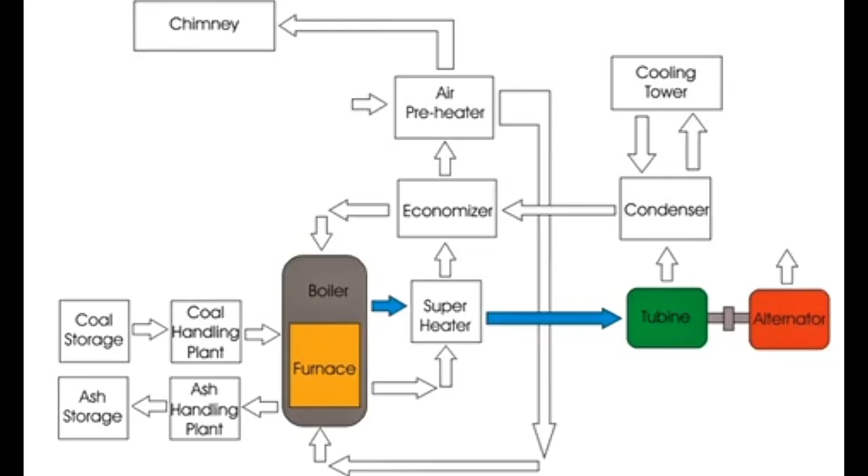Here, steam is produced in the boiler by coal combustion in the furnace. This steam is then expanded through turbine blades. The turbine shaft is the prime mover of the alternator. Due to this steam pressure, the prime mover of the alternator rotates. After expansion, the steam is condensed in the steam condenser and then fed again to the boiler. The rotation of the rotor in the alternator produces electrical power.

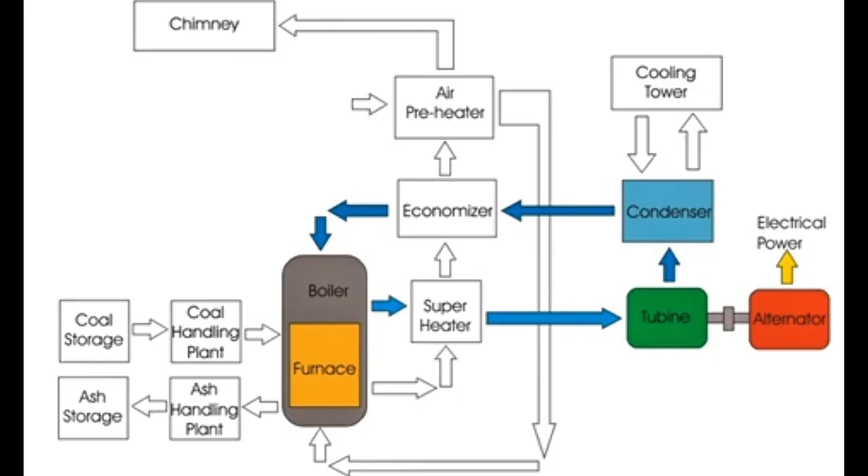These power stations do have some advantages, due to which thermal power plants are the most conventional plant for producing electrical power. Number one, the fuel is coal, and coal is quite cheap in price. Number two, it involves lesser initial and capital cost compared to hydro and nuclear power plants. Number three, it involves less space compared to hydro power plants.

But in addition to these, thermal power plants do have two major disadvantages. Number one, it pollutes the atmosphere much due to release of large amounts of smoke and fumes. Number two, its running cost is higher than hydro power plants.

This power station mainly involves seven major arrangements: one, coal handling plant; two, steam generating plant; three, steam turbine; four, alternator; five, water feeding arrangement; six, cooling arrangement; and lastly, the ash handling arrangement. Let us discuss these points in brief, one by one.

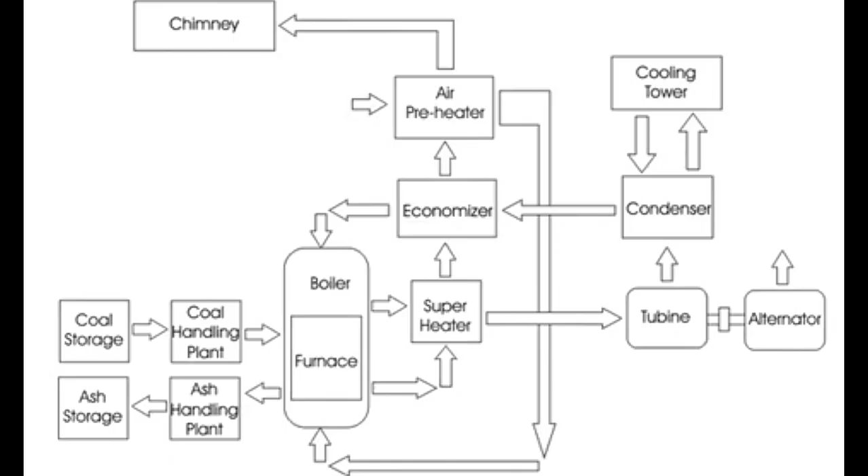The coal is first transported to the power plant, then stored in the coal storage plant. From this coal storage plant, coal is delivered to the coal handling plant, where it is first pulverized. Pulverization is required because it increases the thermal efficiency of the coal. This pulverized coal is then fed to the boiler furnace by belt conveyors. The coal is burnt in the furnace and produces sufficient heat.

Now come to the steam generating plant. The heat produced in the furnace is utilized to convert water into steam in the boiler. The flue gases from the furnace make their journey through the superheater, economizer, and air preheater, and are finally exhausted to the atmosphere through the chimney. The steam produced in the boiler is not fully dried.

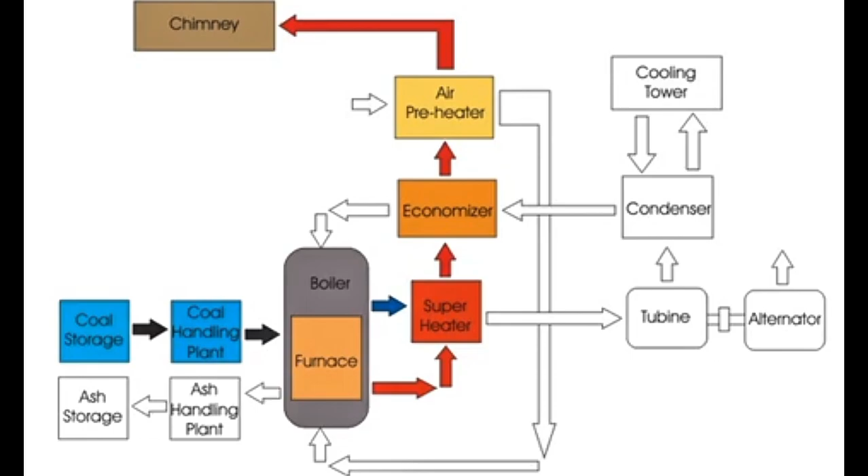That is why it has to pass through a superheater, where the steam becomes fully dry and superheated much above the boiling temperature of water by the flue gases on their way to the chimney. The superheated steam is then delivered to the turbine.

After passing through the superheater, the flue gas still has some heat energy in it. Some portion of this remaining heat is utilized to heat up the feed water to the boiler. Feed water passes through the economizer before being fed to the boiler, where its temperature is increased by extracting heat from the flue gases.

After extracting heat in the economizer, there is still some remaining heat in the flue gases, which can be further utilized to increase the temperature of air before feeding it to the furnace for coal combustion. This air heating is done in the air preheater by means of flue gases on their way to the chimney. Anyway, the superheated steam is forcefully expanded in the turbine and hits the turbine blades, causing the turbine to rotate at high speed.

The rotor shaft of the alternator rotates by means of the rotating turbine. Generally, the turbine shaft and rotor shaft are coupled together.

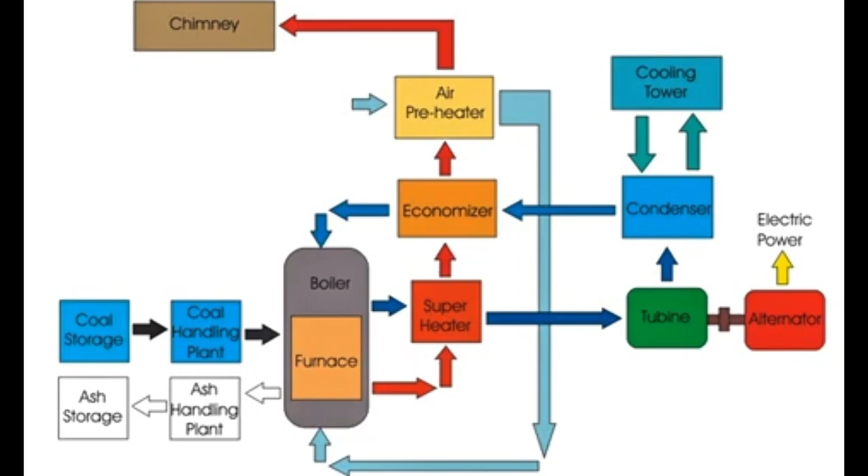After doing its work on the turbine blades, the exhausted steam has to be condensed immediately to give space to the steam behind it. This is done in a steam condenser by means of cold water circulation. The condensate from the condenser is fed to the boiler for further cycle. During this cycle, some water may be lost, which is compensated by feeding water from an external source.

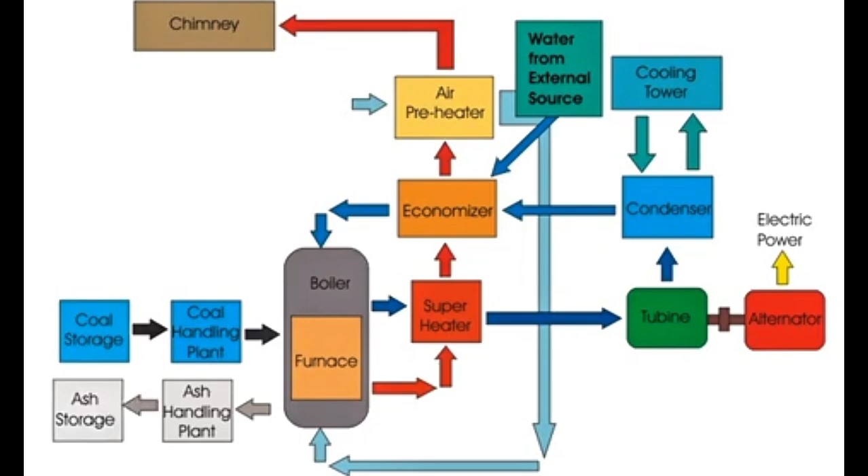The water circulation is done in the condenser by means of water available in natural sources, like rivers, canals, lakes, etc. The coal is burnt in the boiler, and ash is produced after the completion of combustion. The ash is removed to the ash plant and then delivered to the ash storage plant for disposal.

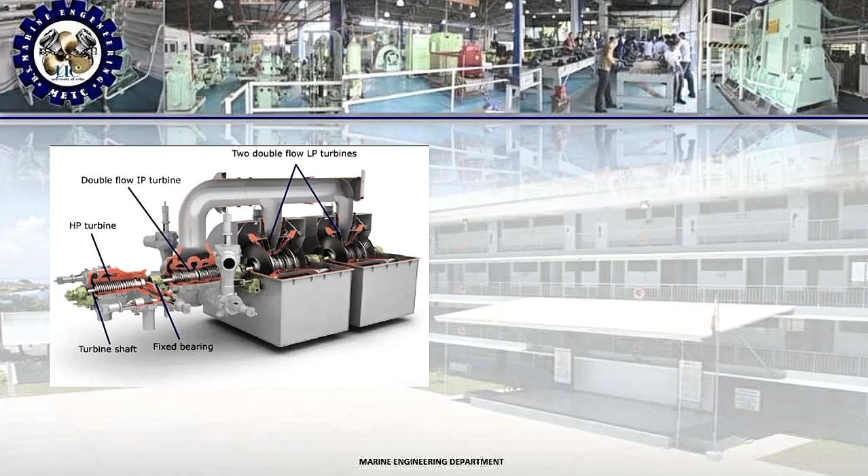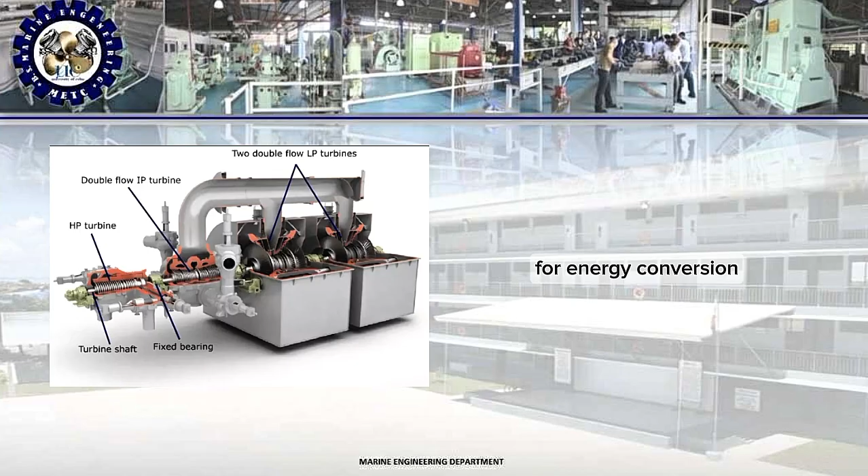Following that overview, let's zero in on the steam turbine. In a steam propulsion plant, the turbine is the single most important component for energy conversion. Its efficiency directly determines the ship's fuel economy and maximum speed.

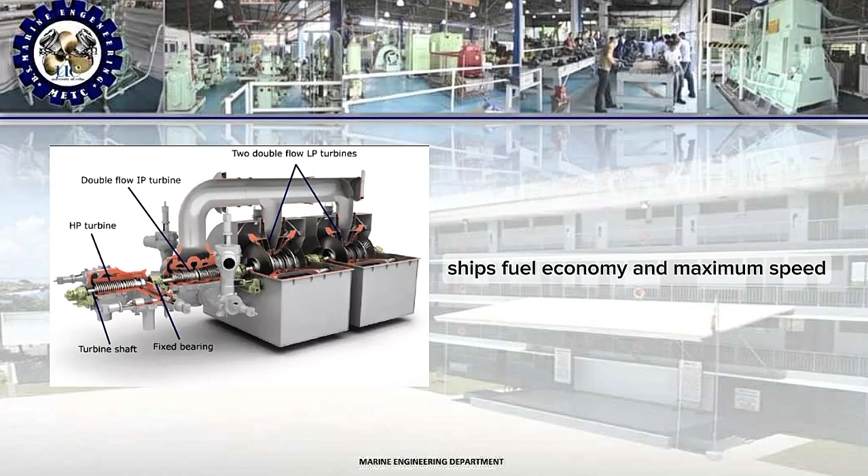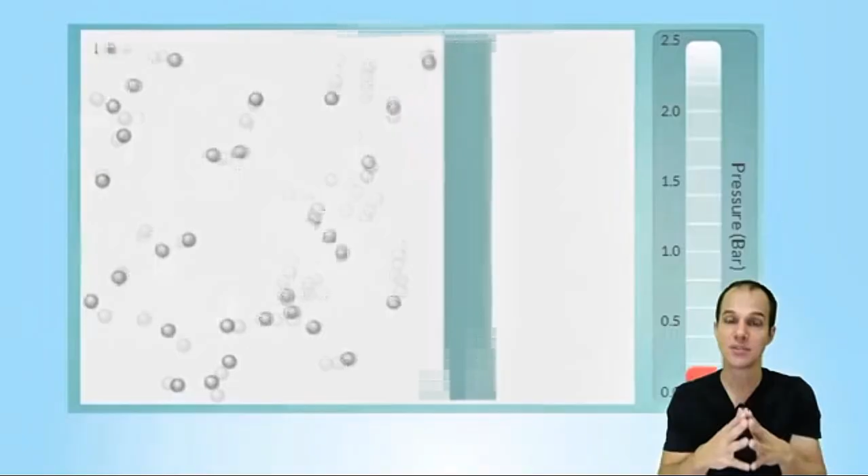So there's an experiment, a demonstration, an illustration that first shows if we keep this temperature constant, what happens to the pressure and the volume. You observe that when we increase the pressure, our volume decreases. It is an inversely proportional relationship.

Since this is clear to us, let's add another parameter. Let's add temperature, let's add temperature variation. Then things change a little bit.

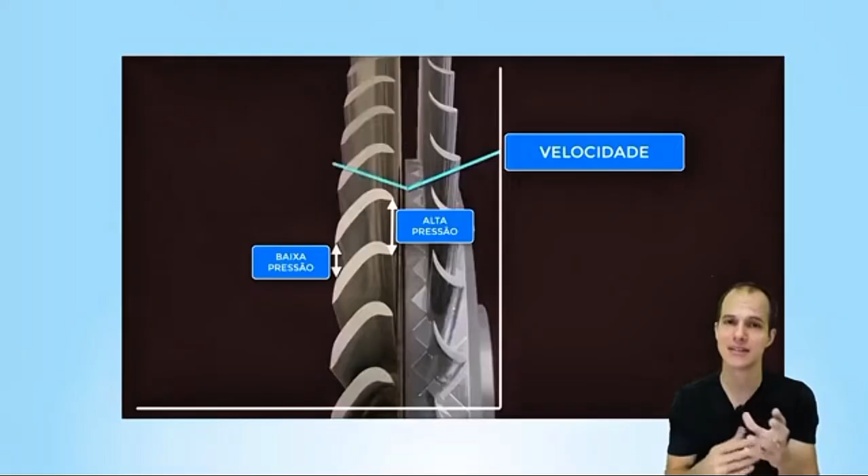During the operation of a steam turbine, the blades that are connected to the wheels, the rotor blades, absorb part of the energy of the steam. These three basic forms of energy decrease, that is, velocity, pressure, and temperature decrease. There are also these concepts.

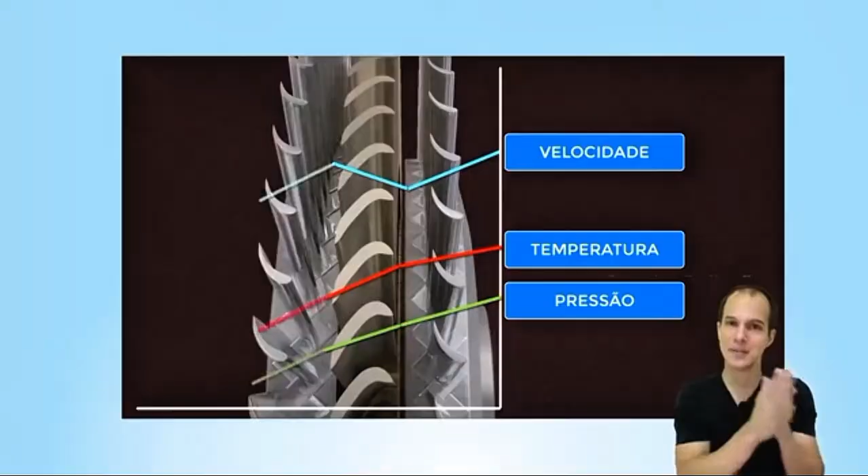So let's now analyze how this happens. Let's analyze the profile of a steam turbine blade. You look at it, it has an aerodynamic profile.

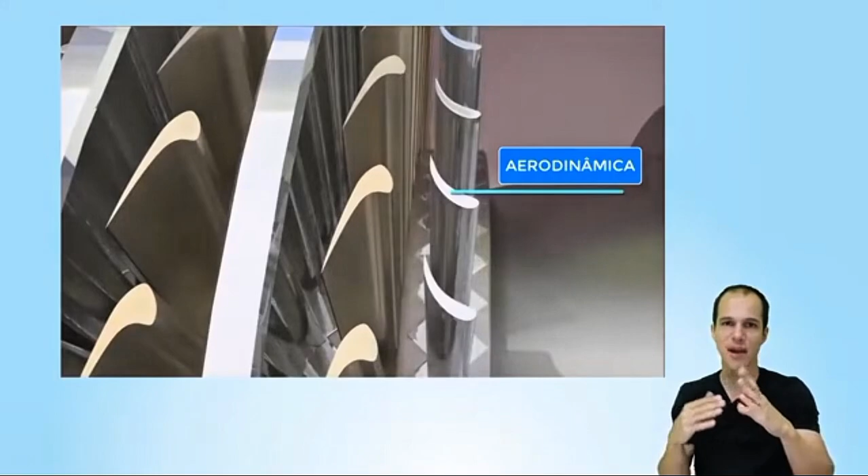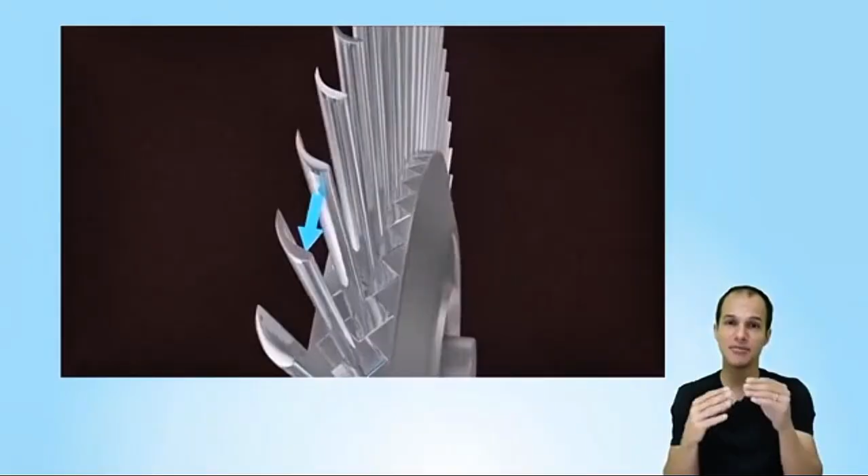When fluid, in our case steam with high energy, passes through this blade, this profile creates a pressure difference. On top it has a higher pressure inside the blade, and outside a lower pressure. That effect, aided by Newton's law of action and reaction, creates a kind of lift force. And that lift force is responsible for making the rotor turn.

But the following happens, as we said, remember? During turbine operation, the pressure, speed, and temperature decrease. In the steam turbine, what exists is the function of depressurizing the steam to increase or gain kinetic speed.

So who is responsible for this? Inside the steam turbines are the diaphragms and the expander plates. But how do they do it? That's what we're going to see now.

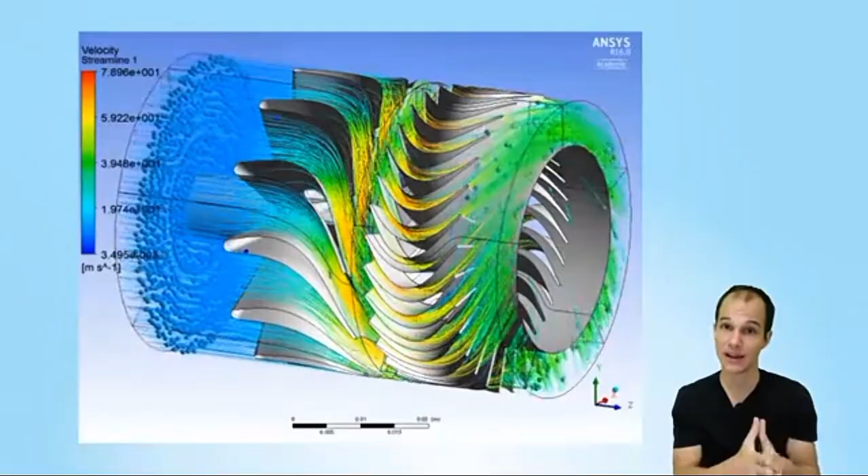We need to analyze a little more thermodynamics. If we look at the profile of an expander or diaphragm plate, I'll leave an animation here so we can understand this and how it works.

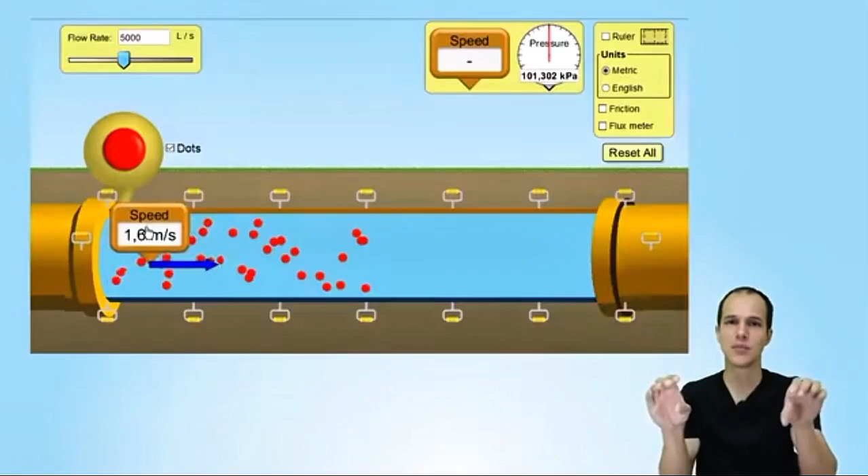If we are inside a duct with the same area and same pressure, we will see that the fluid has a constant velocity. Whereas when we restrict this passage, strangle this area, we have a decrease in pressure. However, we have a gain in kinetic velocity. So that's what these pieces do. They give this speed to the steam.

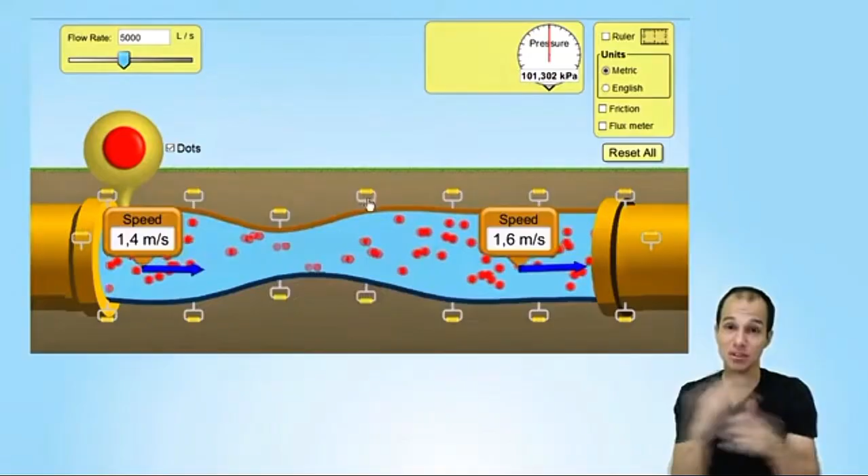This process even has a specific name. It's called the Venturi effect, named after its discoverer back in 1797.

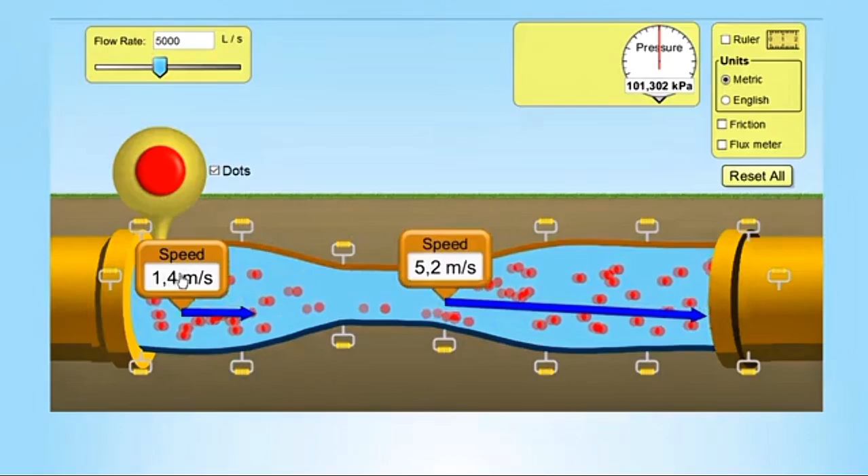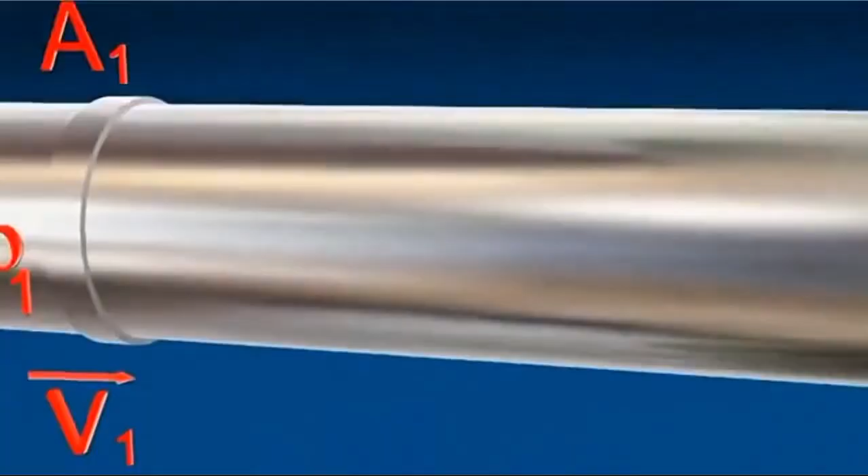So then we have an animation to demonstrate this. We have a duct there with a passage with the same area and the same pressure, so the fluid will flow there at a constant velocity, the same velocity. With area restriction, that is, we reduce this area, reduce the pressure, and we have a gain in kinetic velocity.

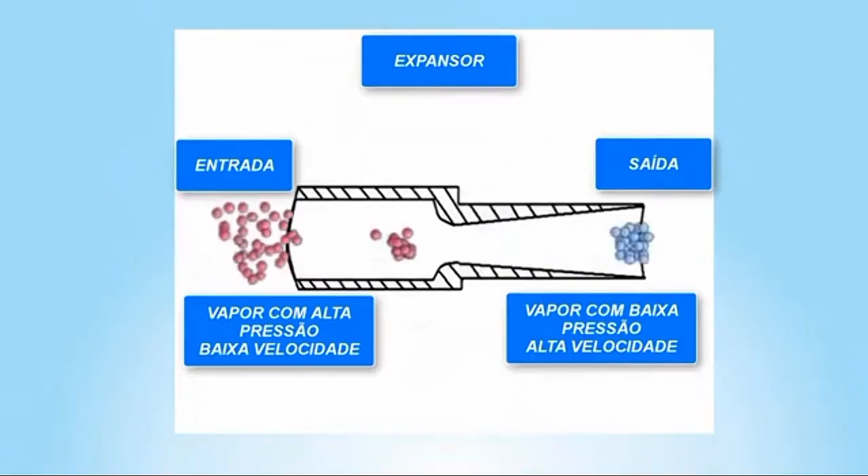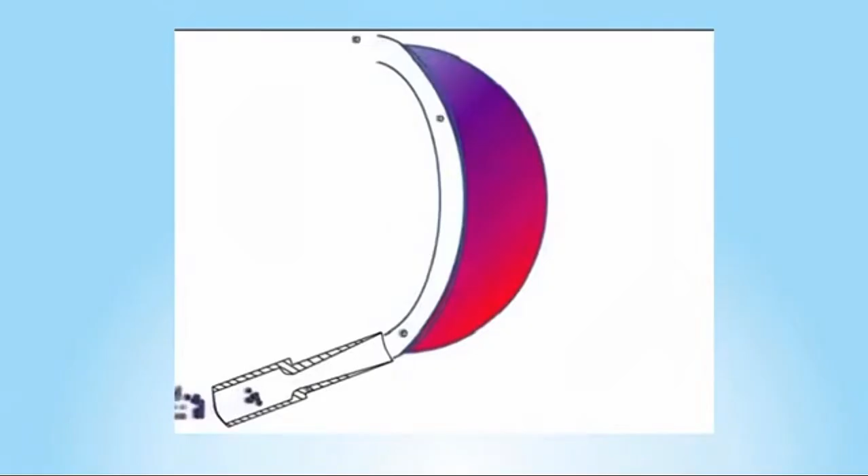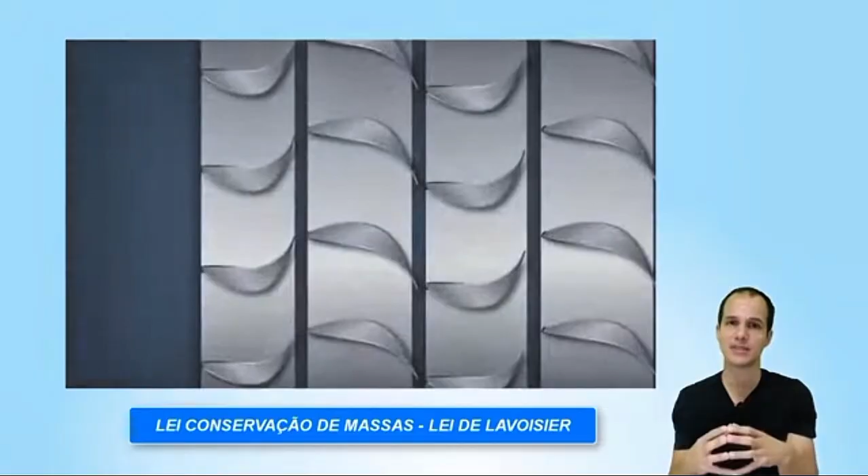So as these parts do not have a considerable loss of energy, what happens? The temperature and pressure actually have to decrease to maintain another thermochemical principle, which is the principle of conservation of mass. We have a mass at the entrance and we have to have the same mass at the exit. But if we have an increase in speed, the other two automatically have to decrease proportionally.

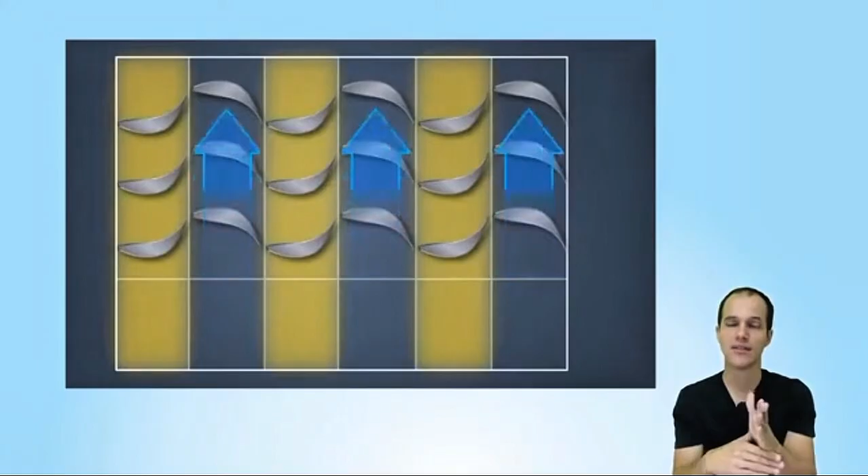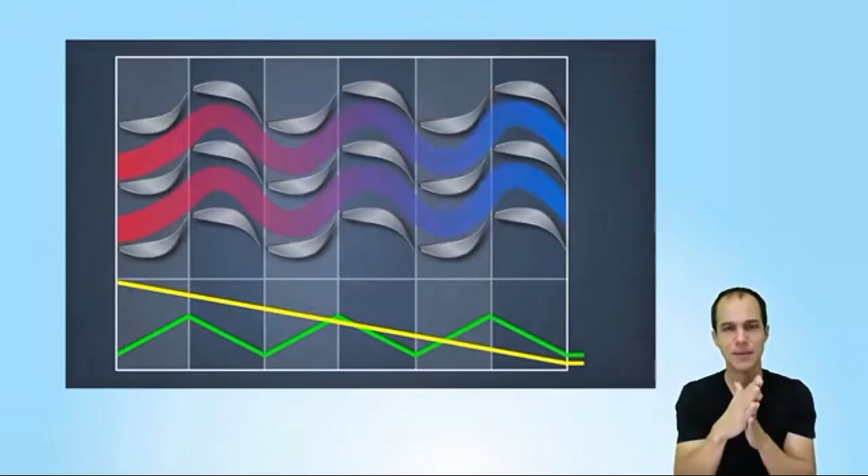Then what happens? At this moment we have another wheel mounted in the sequence, which will capture this velocity, this fluid that we are directing, with this increase in speed that it had. It will capture it, pass through the vane, and convert it into kinetic energy and mechanical energy.

At that moment again, we will have one more drop in pressure and temperature, and so the process will be repeated for as many stages as there are in the rotor. We decrease the pressure - what happens to the volume? The volume has to increase.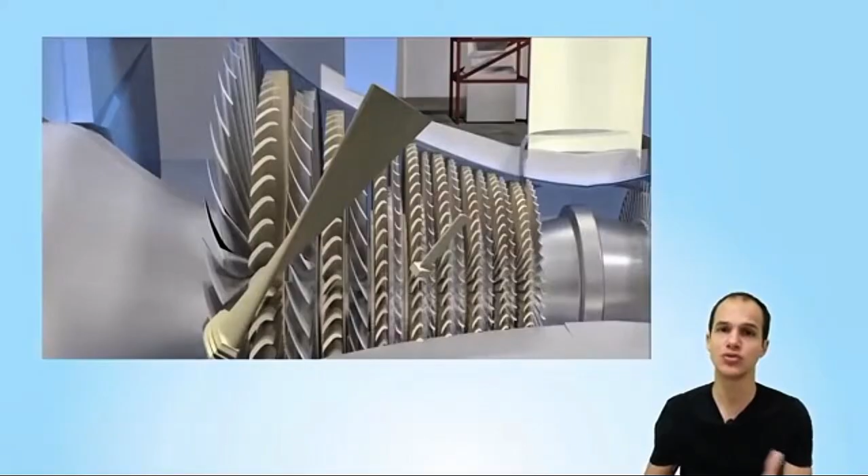That's why in steam turbines, all this flow and this speed of the system, we have to increase it. That's why in the first stages, or in the admission, the pallets are small, and there in the discharge or in the exit, it has the larger pallets, which is precisely to account for all this flow that it increases to.

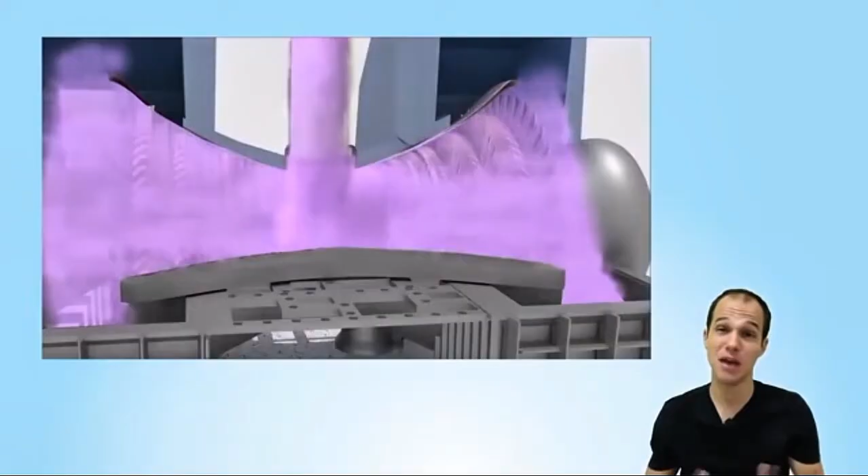We keep the speed, otherwise this machine in the last stages would have a very high peripheral speed. These larger pallets will need to support requests for much greater mechanical effort.

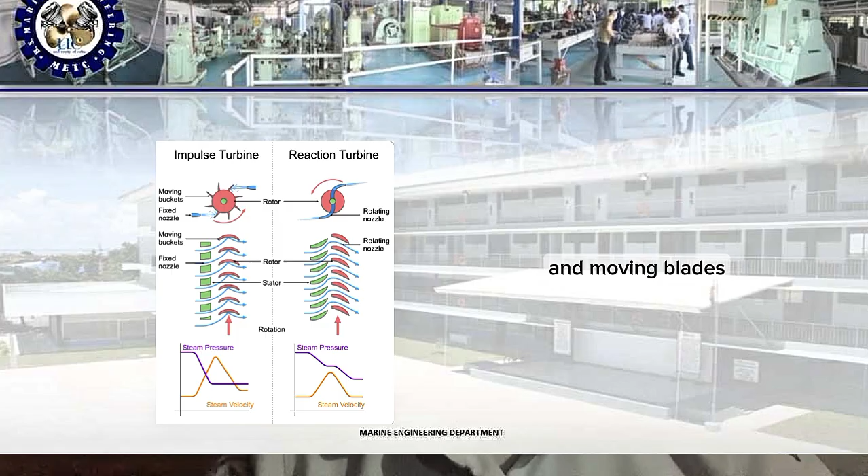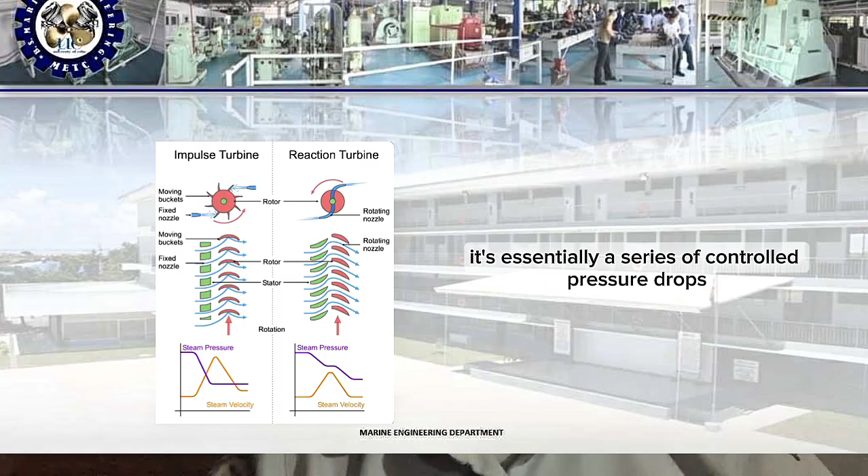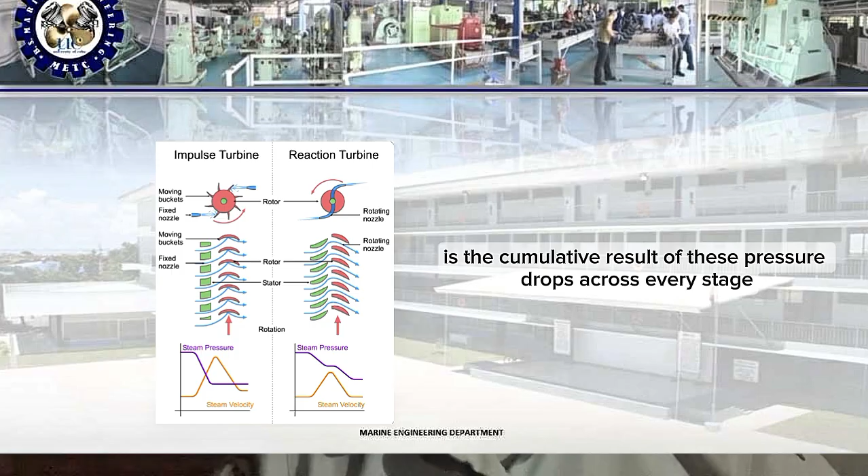Demonstrated, the turbine utilizes alternating rows of fixed nozzles and moving blades. The design is finely tuned to maximize the expansion of steam. It's essentially a series of controlled pressure drops. The total mechanical work, which becomes our propulsive torque, is the cumulative result of these pressure drops across every stage.

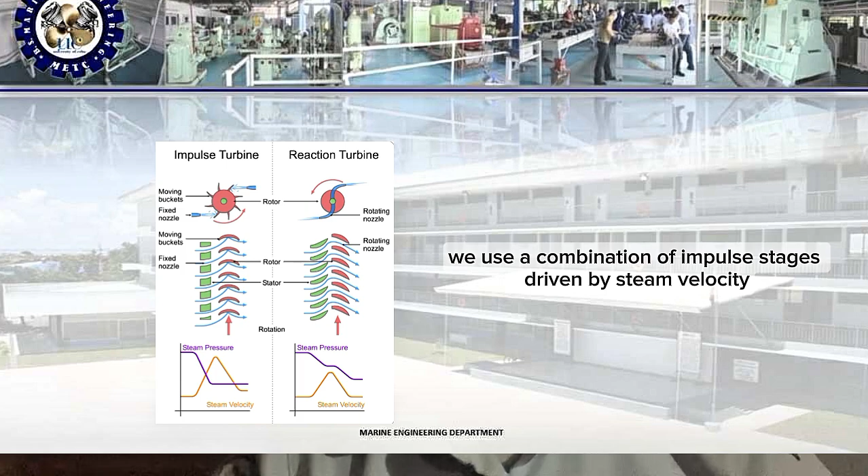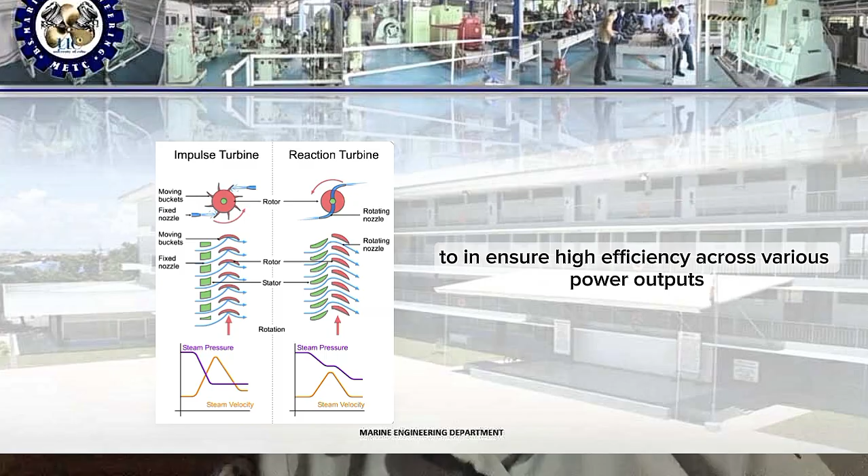In marine application, we use a combination of impulse stages driven by steam velocity and reaction stages driven by expanding steam pressure to ensure high efficiency across various power outputs.

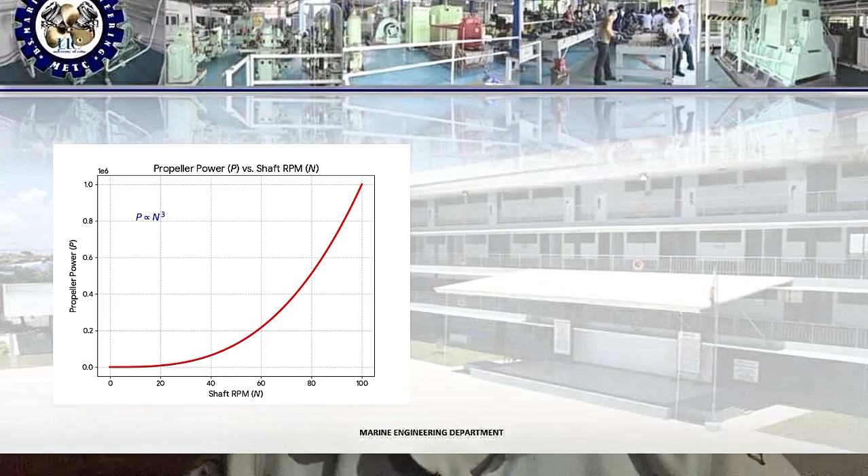The propulsive characteristic of the load is defined by the propeller. The power required to push the ship is not linear. It dramatically increases with speed.

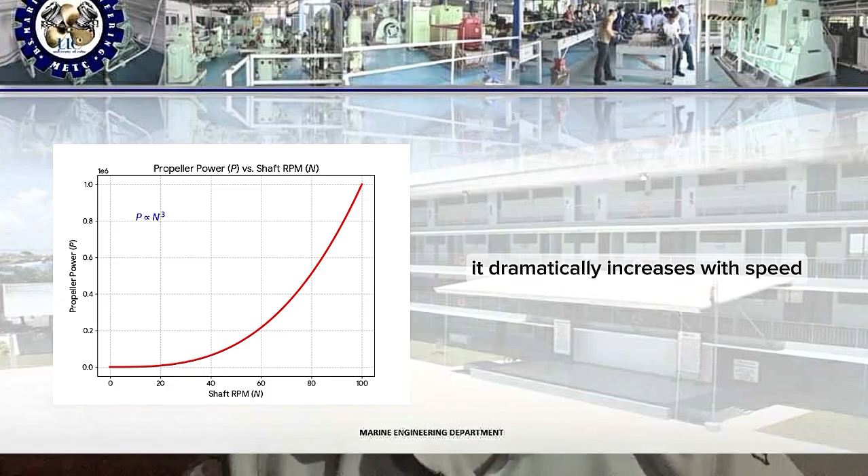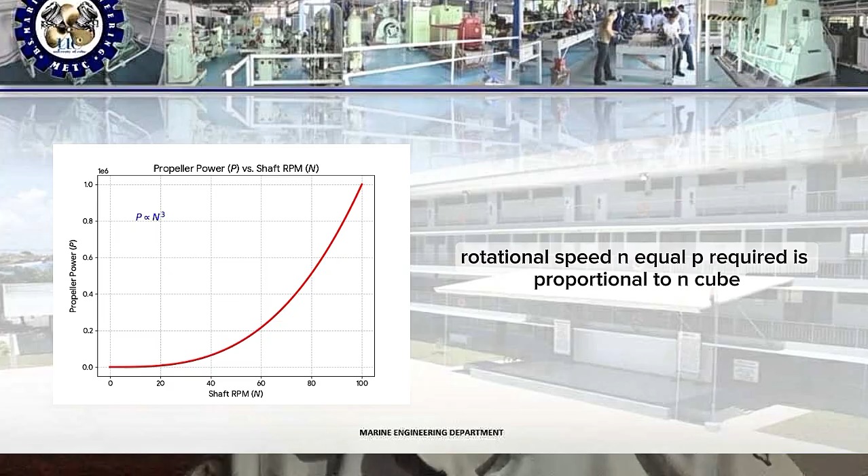The propeller law states that the power absorbed by the propeller is roughly proportional to the cube of the shaft rotational speed, equal P required is proportional to N cube. This means doubling the ship speed requires 8 times the power.

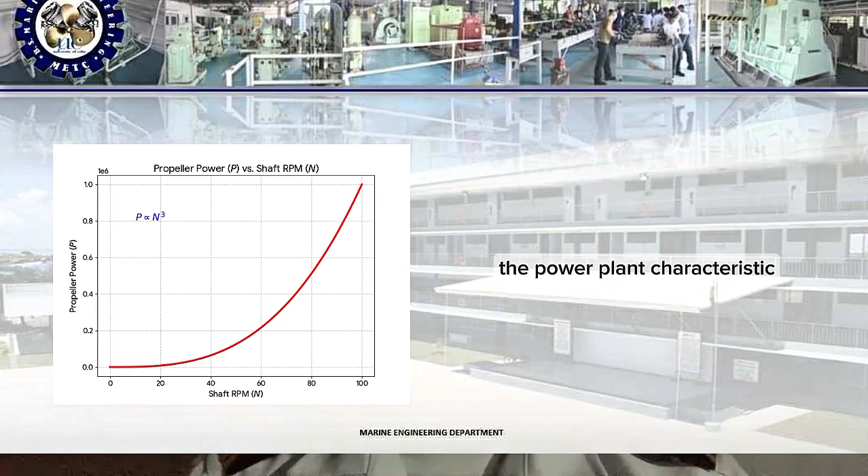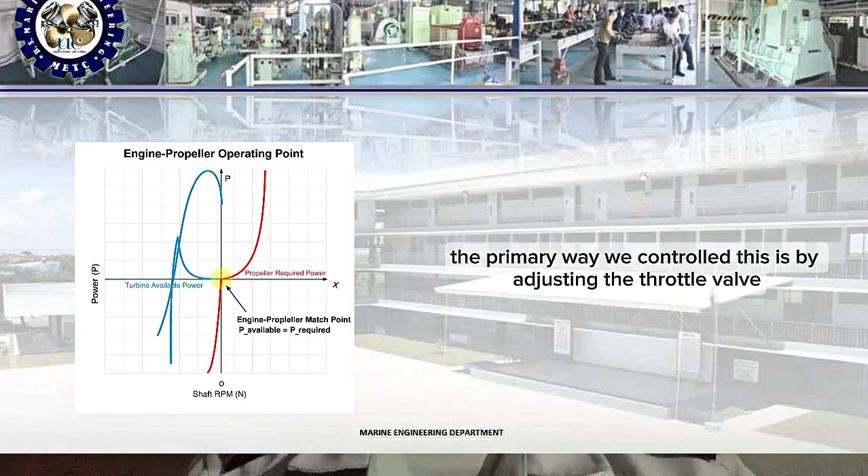The power plant characteristic, the power it can deliver, must constantly match the propeller required characteristic. The primary way we control this is by adjusting the throttle valve, which modulates the amount of steam flow rate delivered to the turbine.

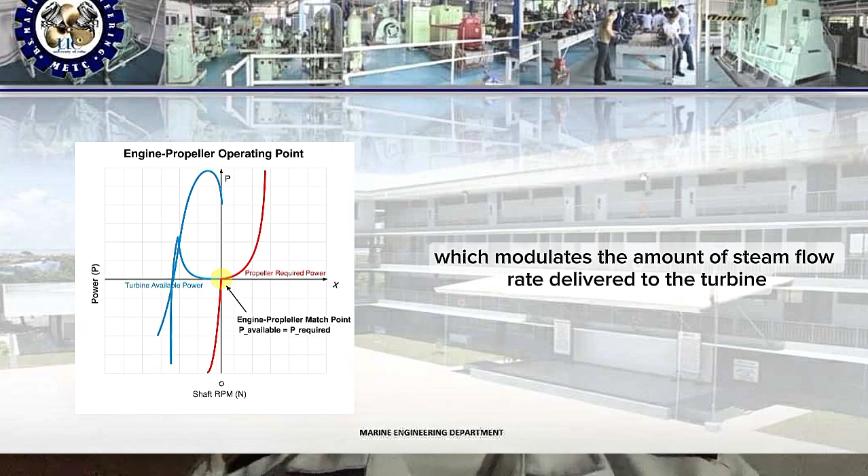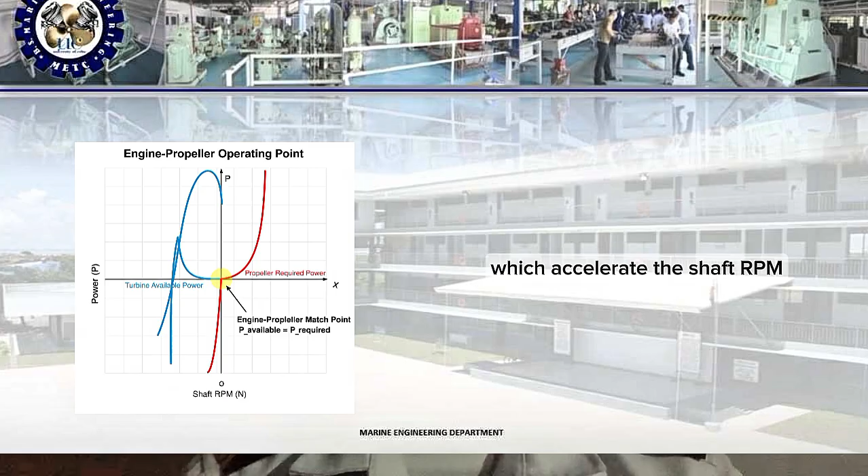Increasing steam flow increases the available torque, which accelerates the shaft RPM until the turbine's power output is precisely equal to the propeller's power demand. This intersection point on the curve is the steady state operating condition.

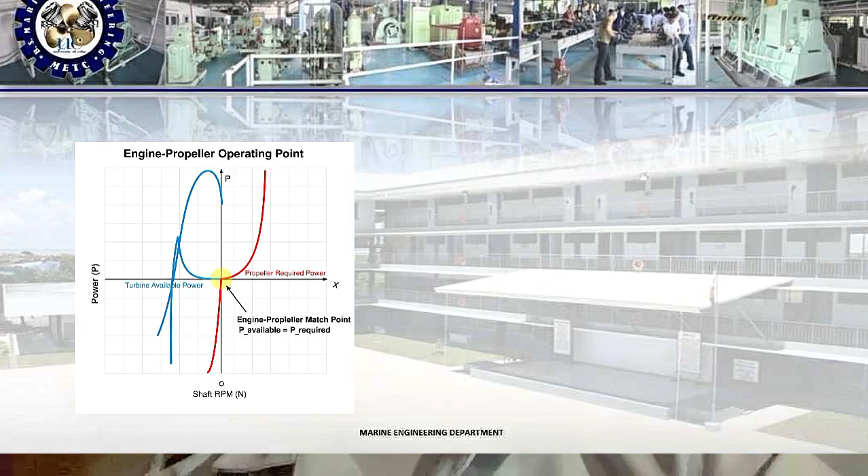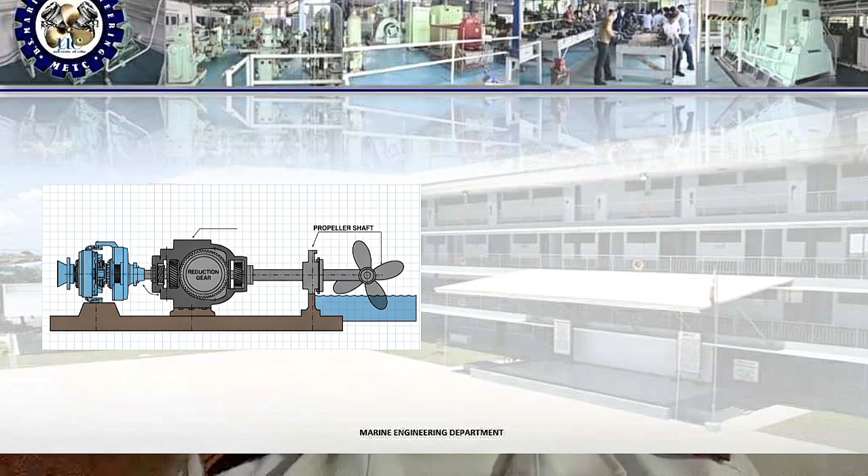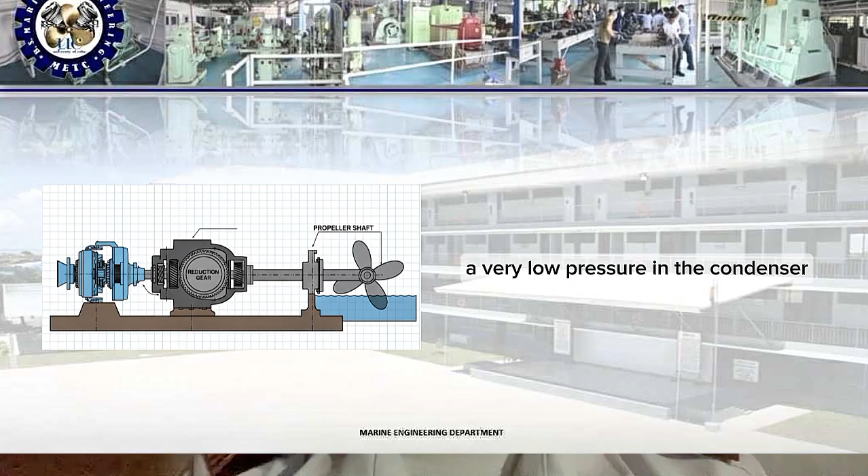The last is condenser pressure. This is often the most critical operating parameter. By maintaining a high vacuum, a very low pressure in the condenser, we maximize the total expansion ratio across the turbine.

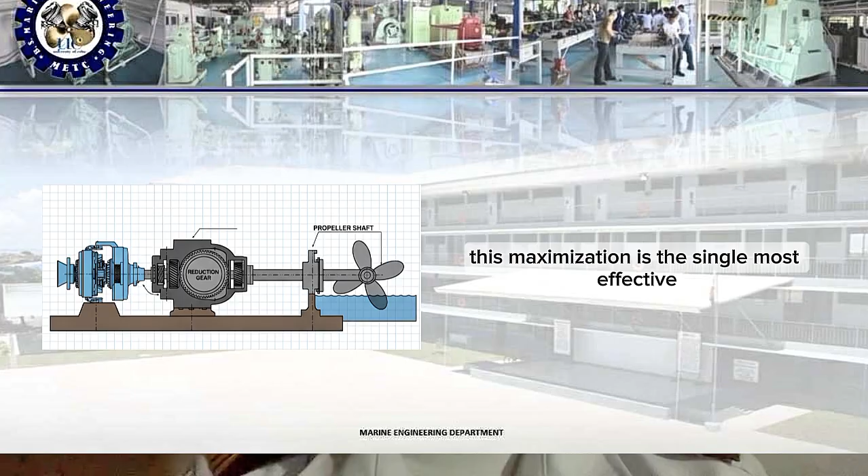This maximization is the single most effective way to extract the maximum available energy from the steam, directly boosting the ship's propulsive efficiency and characteristic. A loss of vacuum results in an immediate and significant drop in propulsive power.

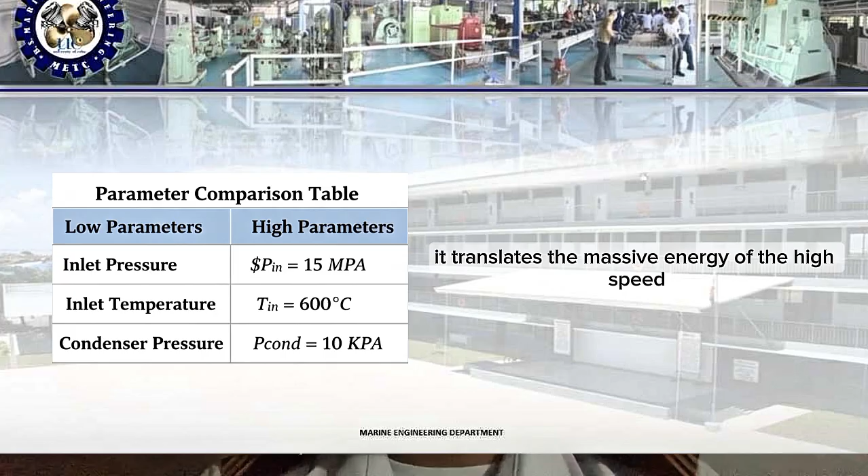To deliver this propulsive power effectively, the reduction gear is indispensable. It translates the massive energy of the high-speed turbine into the necessary high torque at low rotational speed required by the propeller to efficiently move the ship through the water.

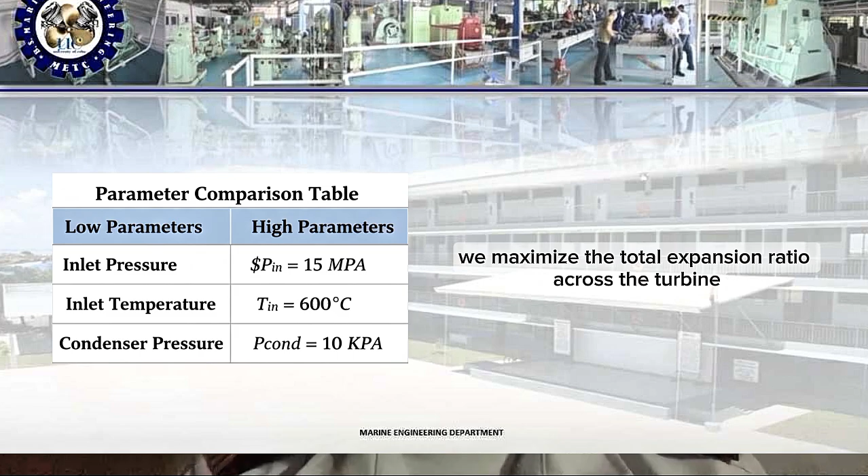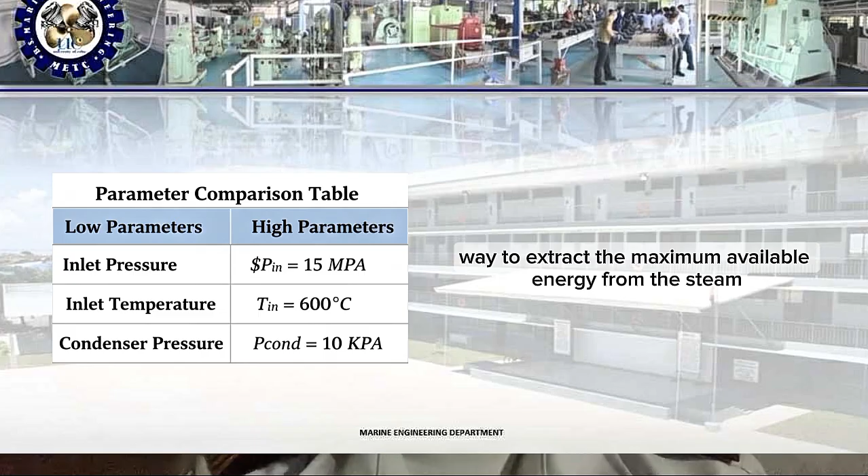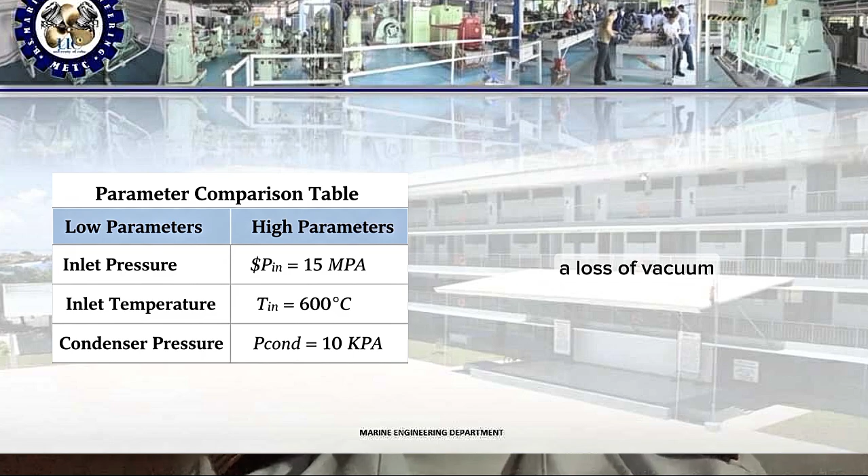The last is condenser pressure. This is often the most critical operating parameter. By maintaining a high vacuum, a very low pressure in the condenser, we maximize the total expansion ratio across the turbine. This maximization is the single most effective way to extract the maximum available energy from the steam, directly boosting the ship's propulsive efficiency and characteristic. A loss of vacuum results in an immediate and significant drop in propulsive power.

Summary: explaining the propulsive characteristic involved defining the relationship between the plant's steam flow control and the propeller's P required is proportional to N cube requirements, all while optimizing high inlet parameters and maintaining that essential high vacuum.